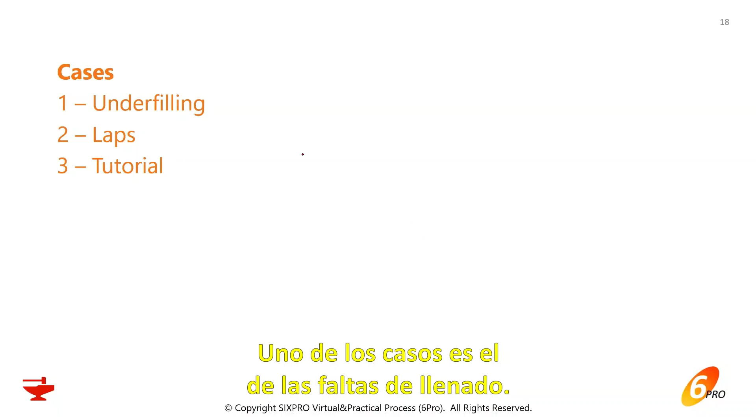Now let's talk about the cases. For this short training, we prepared 2 basic cases, and I'll also show you a tutorial where there are many others. Let's go step by step - one case of underfilling, and one case of laps, and I'll show you where to find the tutorial. It's very easy to access.

Underfilling. Let's look here on the left - it's the initial technology for the forging, and on the right is the optimized technology. What happened? You can see this part is different from this one. This one is well finished, but this one has underfilling - it doesn't fill the dies. You can see there's more material here in the flash than in the final part, because more material went out due to underfilling problems. You can check also here, here, and there.

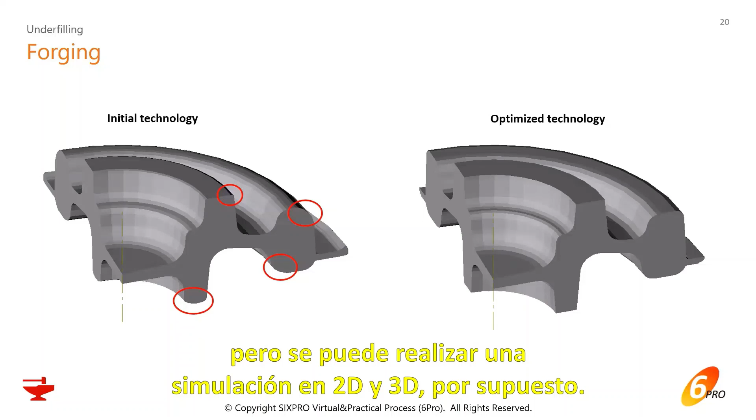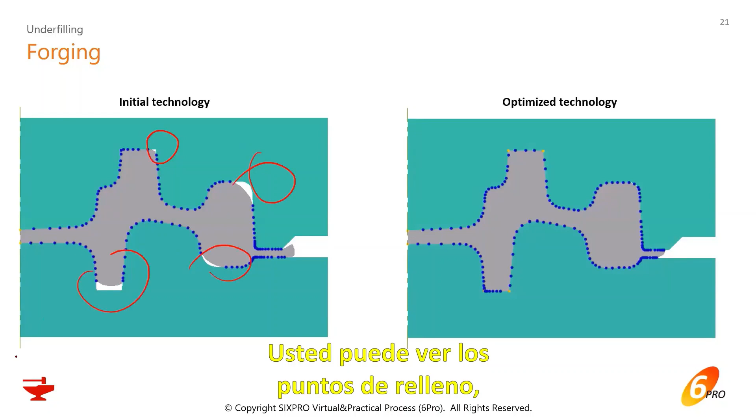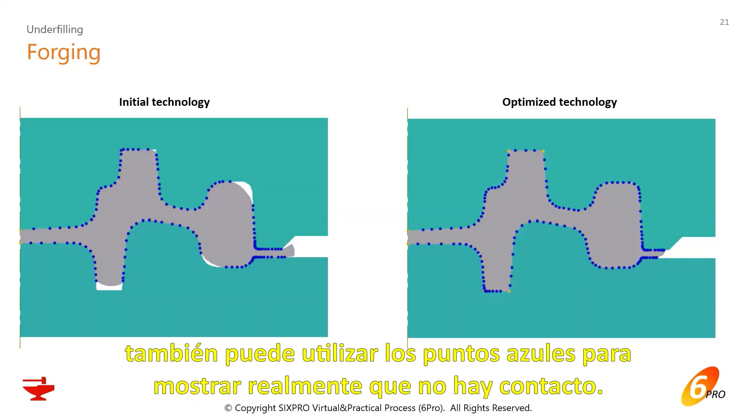Let's show here how you can simulate that. By the way, I'll just show 2D simulations because they're faster, but you can conduct both 2D and 3D simulations. Here's the initial technology and optimized technology - you can see points of underfilling. You can also use those blue dots to be really sure there's no touching.

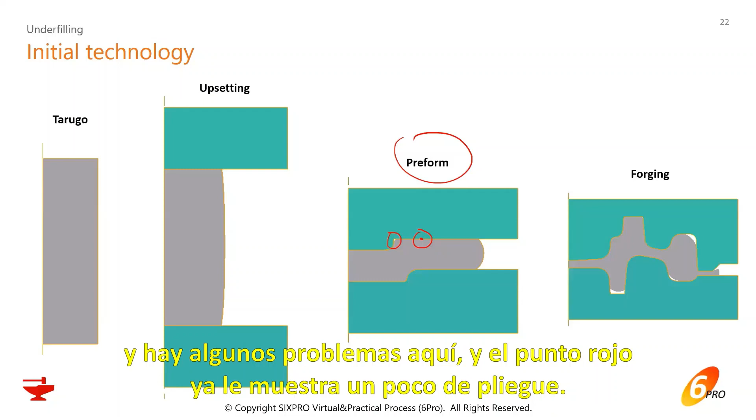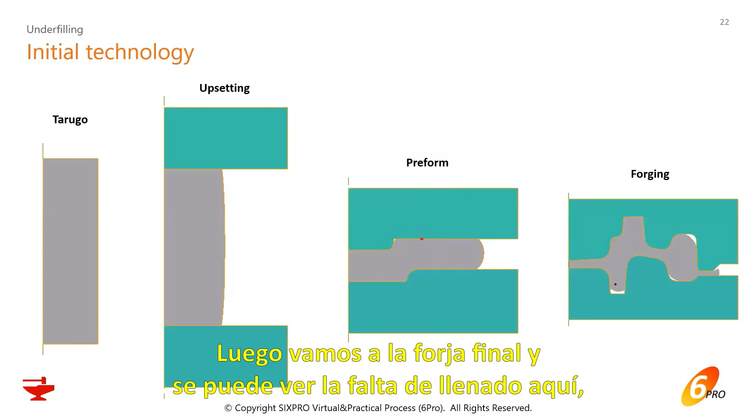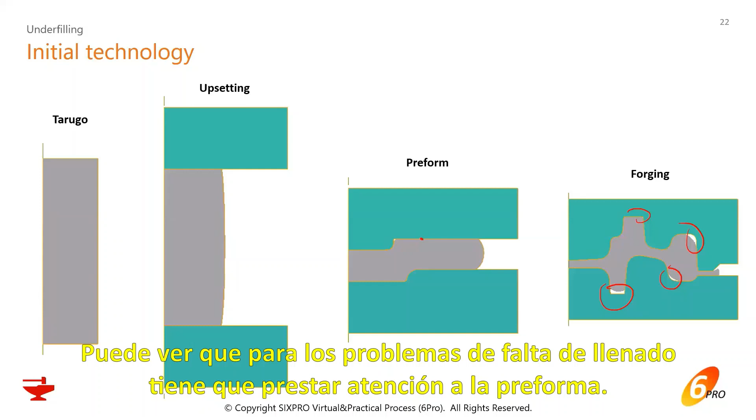The optimized technology is on the right side. In the initial technology, you can see there's an upsetting operation - this is a 2D axisymmetric line because the part is round and symmetric. Then you have this preform, and there are some problems here - you can see underfilling also. This red dot shows some laps, which isn't the objective of this case, but you can already see it. Then in the final forging, you can see underfilling here, here, and here, and also one there.

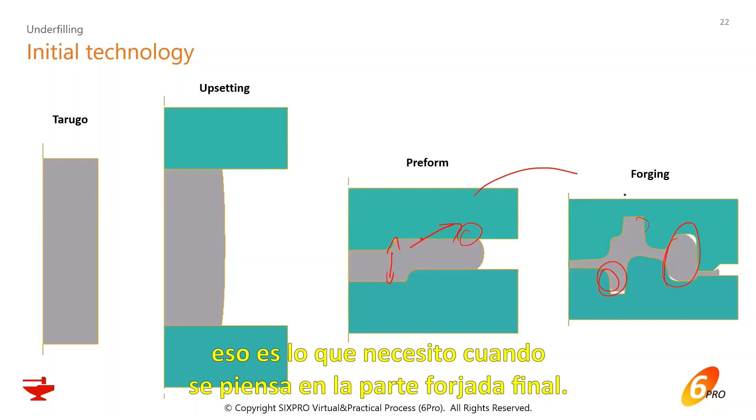For underfilling problems, you have to pay attention to the preform, because we need more material here and more material here, and also a little bit there. So maybe if we increase the amount of material in this part and flow more material to this part, that's what's needed considering the final forging part. So we're basically going to change this preform.

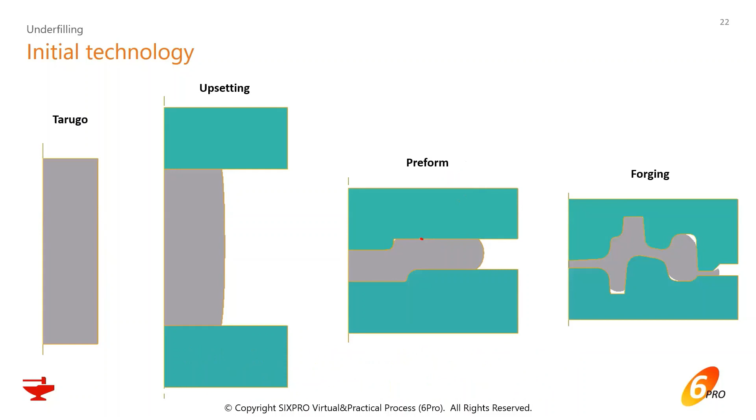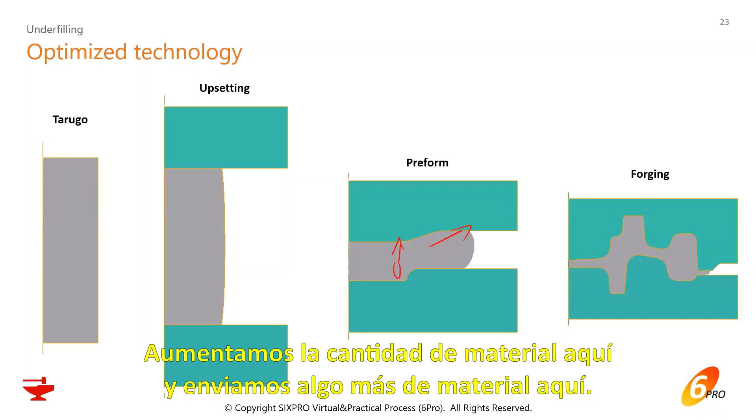Here's the initial technology and the optimized technology - we increased the amount of material here and also sent some material here. When you check the final part, you can see there's no problem - it's fully filled.

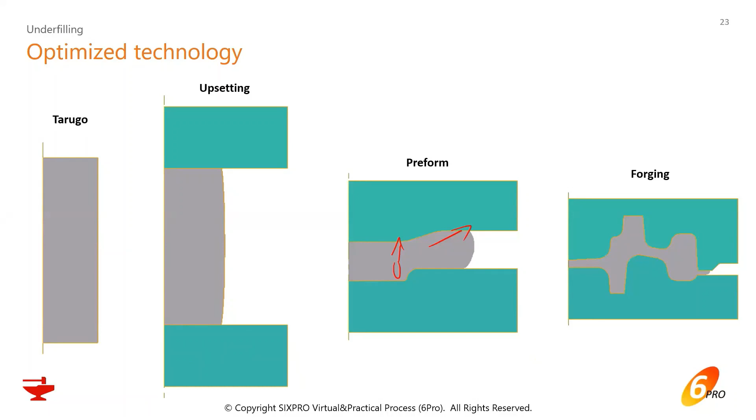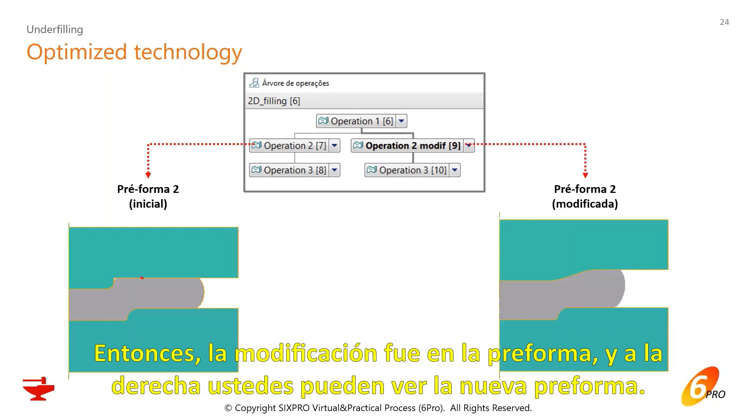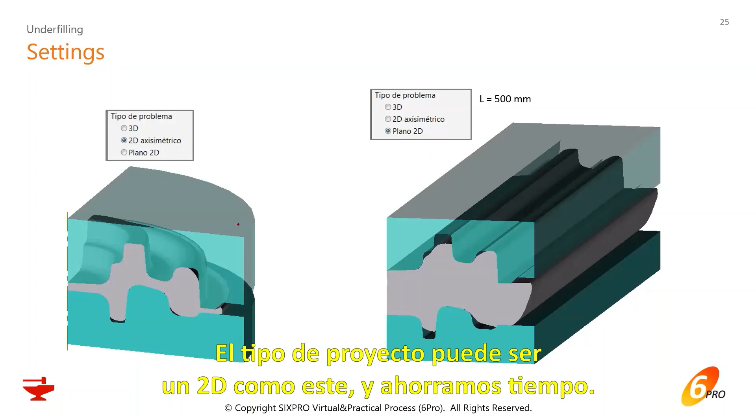Basically what we did was change one of the operations - we changed the die geometry. The modification was here: on the left you see the preform, on the right the new preform. The problem type can be 2D axisymmetric or 2D longitudinal, but doing it this way saves time - you tell the software this part is round, so you just specify it's 2D axisymmetric.

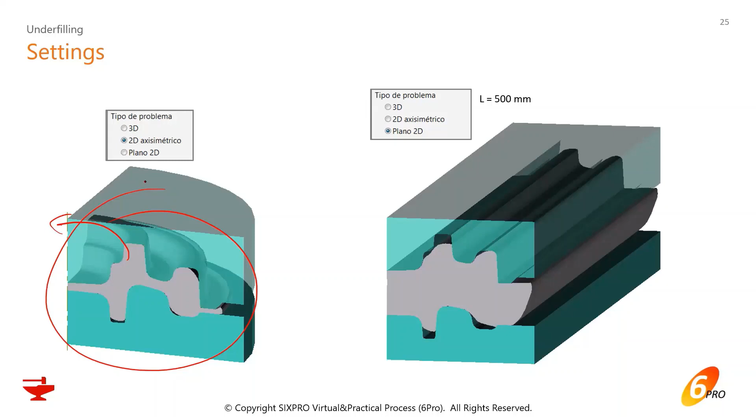We're going to provide you guys the geometries and the software, okay? But here in slide 26, you have all basic information you need for conducting a simulation. I'm going to show this here slowly, so you guys can understand that.

I'm going to just do this initial one, then you can conduct the optimized version. One thing I want to tell you is that I'm going to show it here. You still don't have the license, probably by this time.

But when you try it by yourself, understand that you have a step-by-step FE setup here, starting from slide 27. First, create a new process, then define the problem. It's step-by-step. Click forward, you're not gonna have a problem. If you have any kind of problem, just let us know, I'm gonna help you right away. Then you can see it step by step.

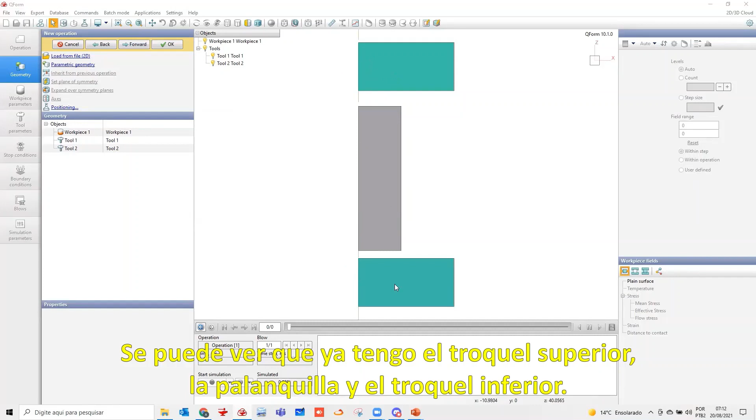Now I will load files, load the geometries that you are also going to receive. And when I go here, see, I'm gonna choose this initial one, and you can see I already have the top die, billet, bottom die. Okay, it's all here. All right, and go forward.

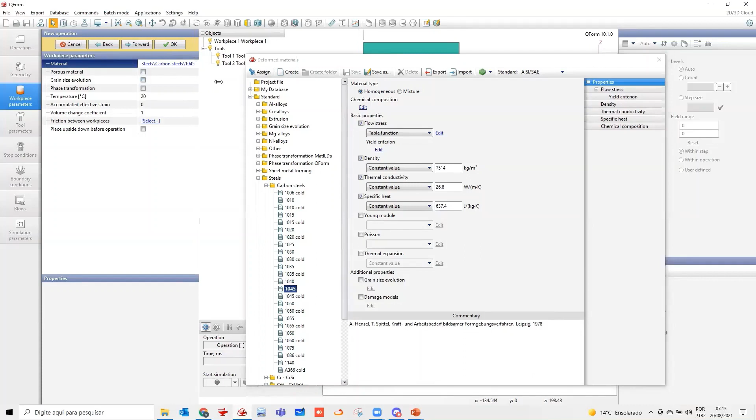Now I'm going to select the material. I have to remember which one. If you go to slide 26, you're going to see it's 1045. Initial temperature that comes from the furnace, it's 1200 Celsius. So the material here, I'm going to pick 1045, assign it. You can see it's already assigned there. And now let me close it. 1200.

And forward. Now it's time to set the tooling. All right, so for tool 1, you can see here is also in orange. Tool 1, my presentation says, okay, consider a mechanical press with 25 meganewtons, and that's what I'm gonna do. So I have a lot of information here, so I'm going to the mechanical press. There's this one, mechanical press, sorry, there's this one here, and assign that.

So you can see, because actually my upper die, the top die, is attached to the press, so we will have this movement, and the bottom die is going to be fixed, plus OZ. Okay, two clicks here, it works. Assign here also works. All right, lubricant, I'm going to choose a lubricant, hot forging, steels, graphite plus water.

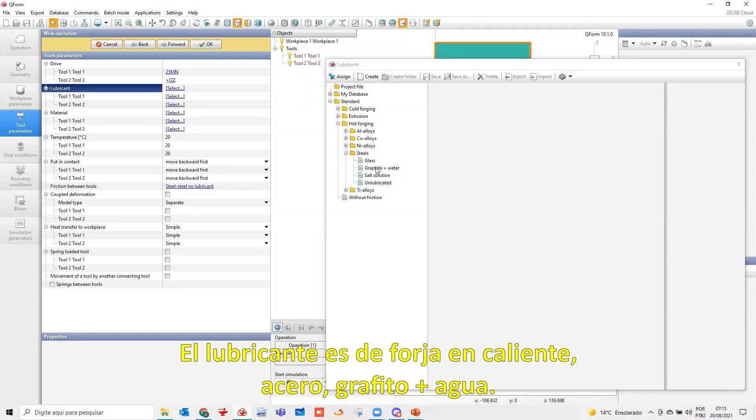Material, it's H13, right? H13, and also there is a heating of the dies. Let me check here again. It's 300 Celsius, all right, so the dies are preheated. Okay, that's it, now I can go forward.

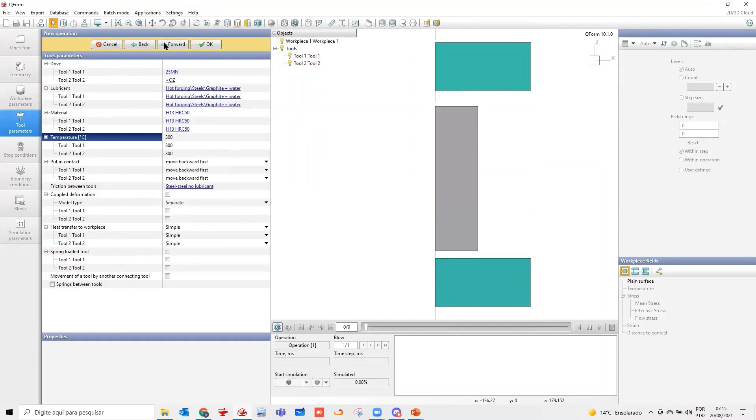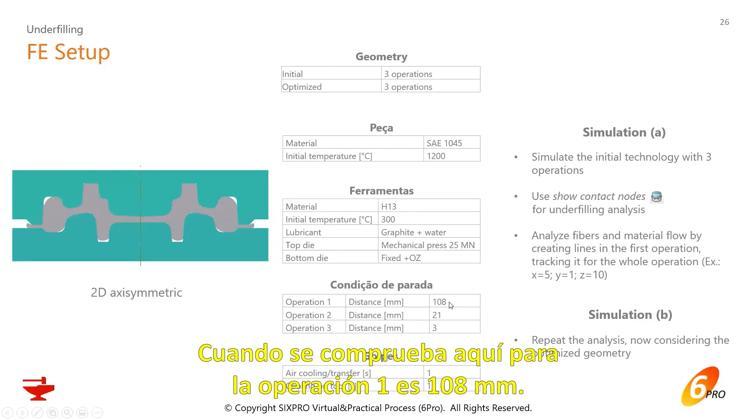And what is the stop condition? There are many stop conditions here on the left. When you check here, it is for operation 1, 108. Okay, stop condition, so let's do this. Distance 108. All right, and you can go forward.

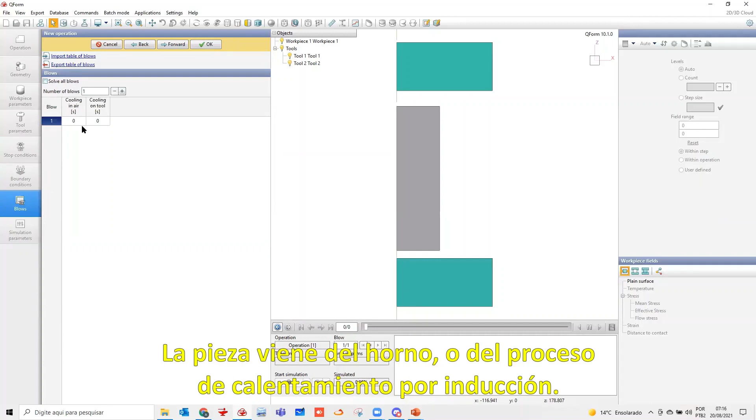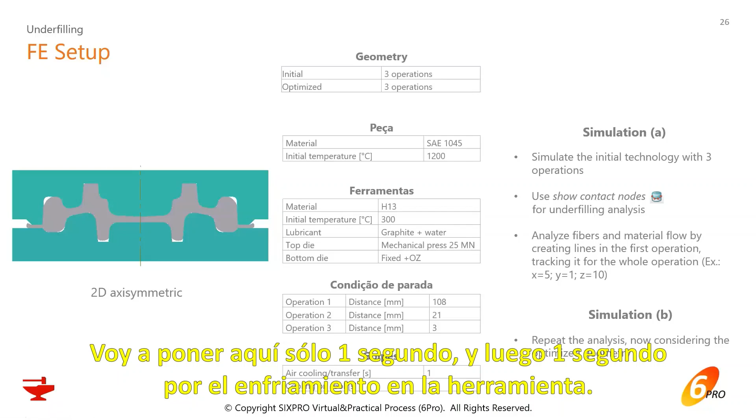And that's all. By this time I can... there is also this, because the part comes from the furnace or from the induction heating process, and it has a transfer, right, and cooling in the air. Then after cooling in the air during the transfer time, it cools also when it's on the tool, on the die, because it changes heat by conduction. So let's say the furnace is very close to the press, so I'm gonna just put here 1 second. You can put 2 seconds, 5 seconds, and then 1 second for cooling on tool. So it's one here and also one here.

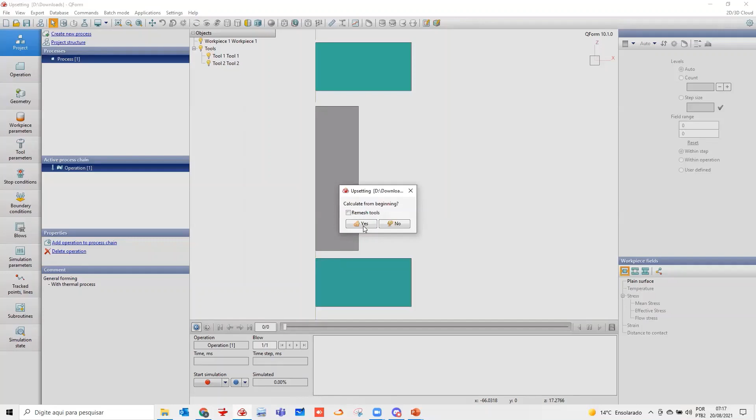All right, let's click OK, and let's start the simulation. Restart. Yes, and I'm gonna save here. Upsetting. All right, I saved somewhere in my computer the results, and here we can see it working. It starts connecting to the license server.

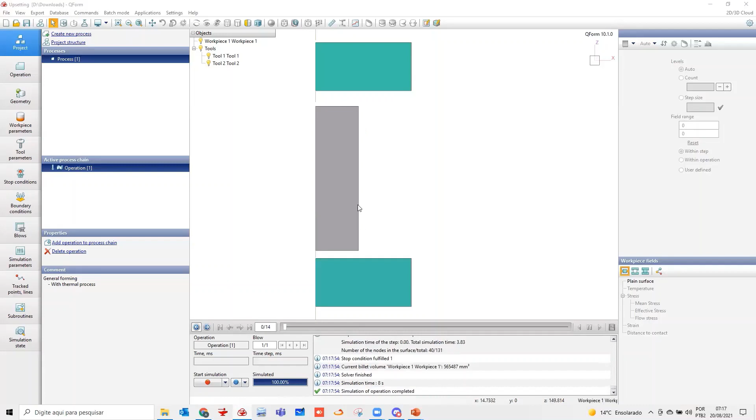Something important here: I'm watching the FE setup, but if I go to the right, I can see the simulation, and I can even work and go forward and backward on my simulation. See, you can also see it in 3D. Okay, this is my part here. I can turn off the dies or the part if you want.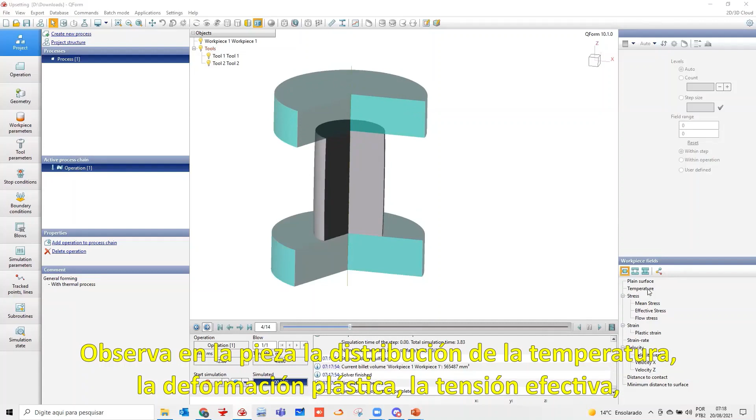I can also make it like this. You can watch on the part the temperature distribution, plastic strain, effective stress, mean stress, flow stress, and the strain rate also, vectors of speed and velocities. So you can see how it works for any type of part that you're going to forge.

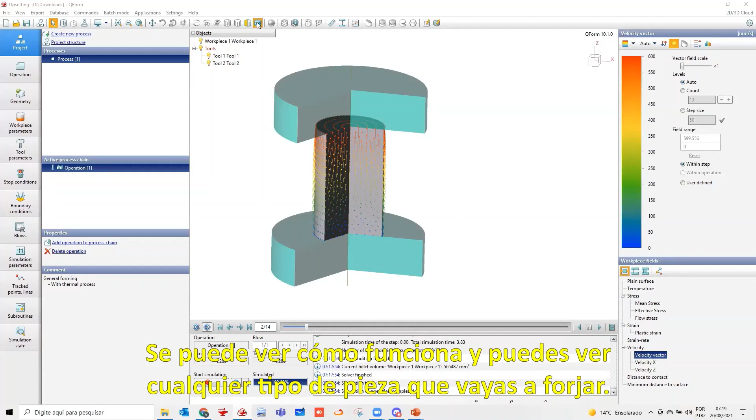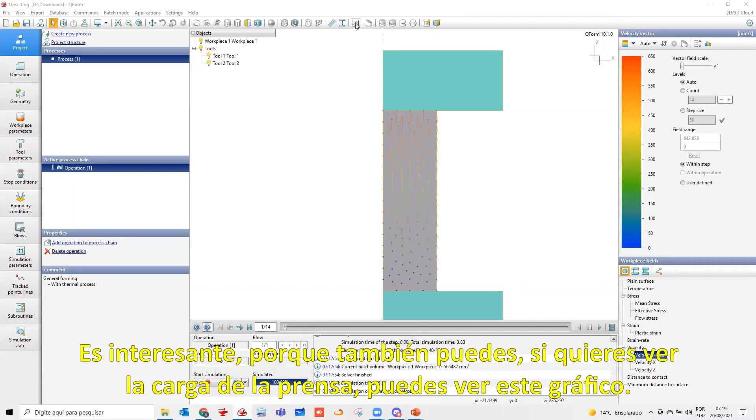Okay, and also have this type of visualization. It's interesting because, let's say, I want to see the press load, so you come here to this graph, and you can also see the load by the displacement of the top die. So displacement, and you can see the load during the process.

More than that, you can also track, like putting a sensor there. You can track any point in this. Let me put it like this. So you can, for example, come here to track points and lines, and I can track any point anywhere I want.

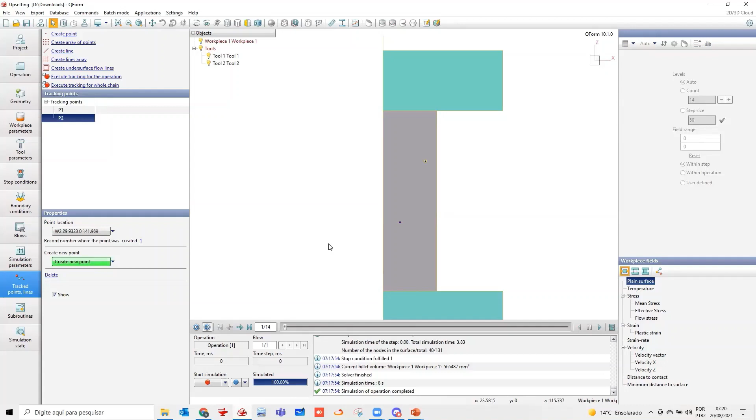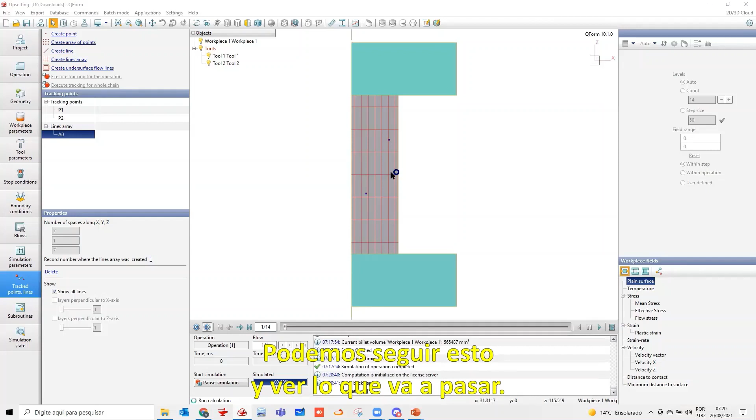I also would like to see the fiber deformation. Just put some fibers here, vertical or horizontal, and you can track this. You're going to see what's going to happen, and you see the fiber deformation and the points here.

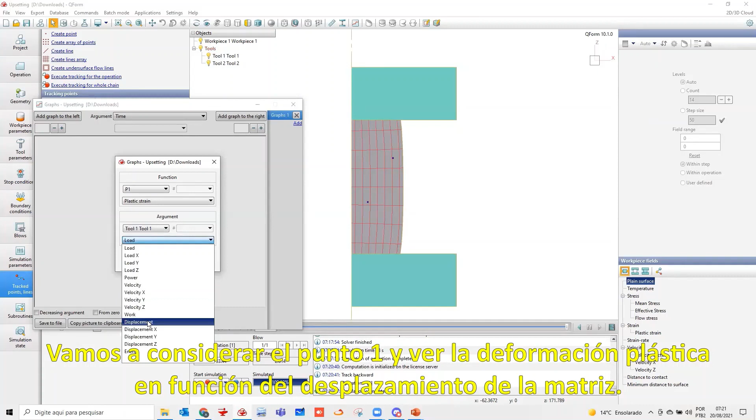For example, let me do another analysis here. I'm going to consider this point 1, and what was the plastic strain there in function of the die displacement. So you can see that the plastic deformation increases, of course. I'm going to also put the other one, point 2. So point 1 had a bigger deformation - interesting.

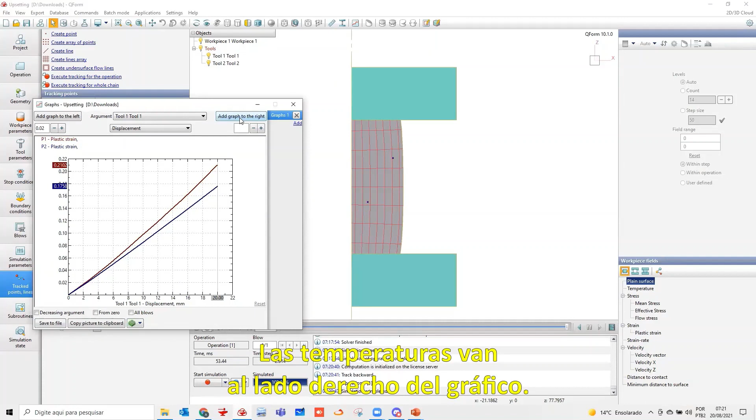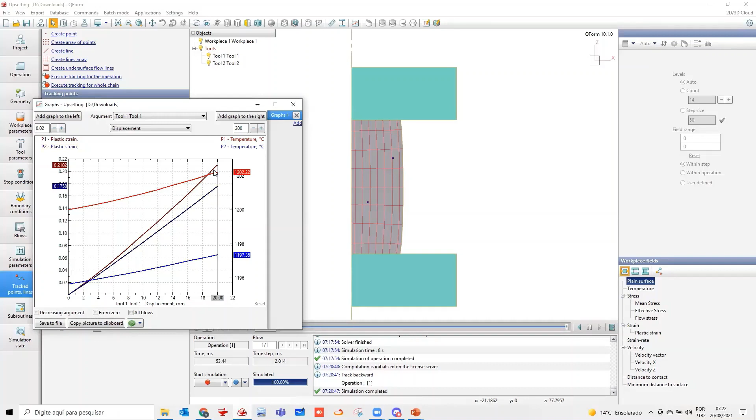And I'm going to put on the right side of the graph, not plastic strain, but temperature, for point 1. So you see that as it deforms and strains, the temperature increases. Let me also see for point 2 - I also have temperature, and both increase because both are increasing their plastic strains. So you can create this, then export and analyze it. It's good for understanding the process, for conducting your research, and also for proposing solutions to a process.

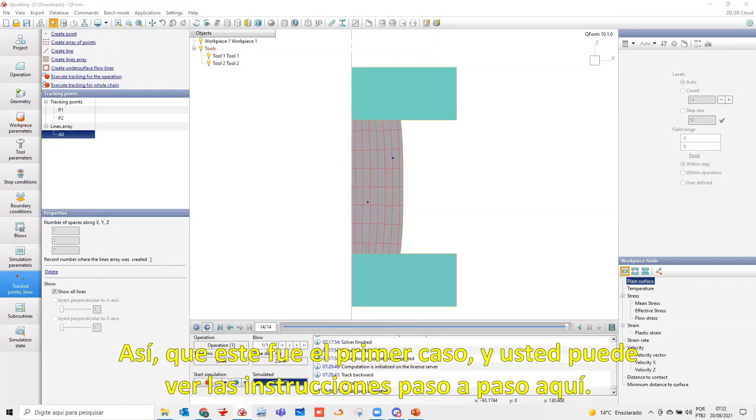All right, so this is the first case. It's all well shown step-by-step in the instructions here. Okay, now let's go to the second case: lap prediction.

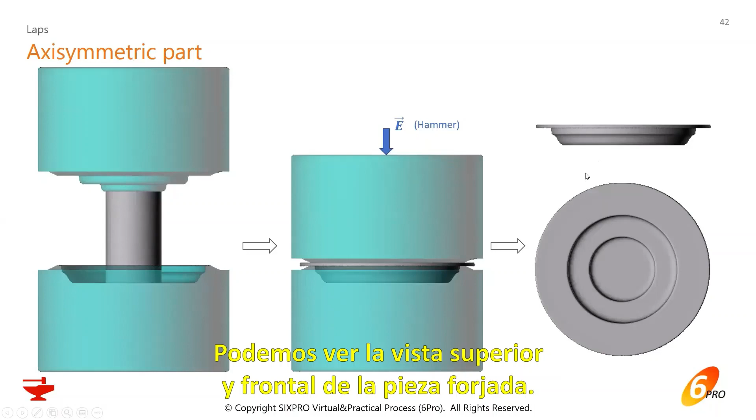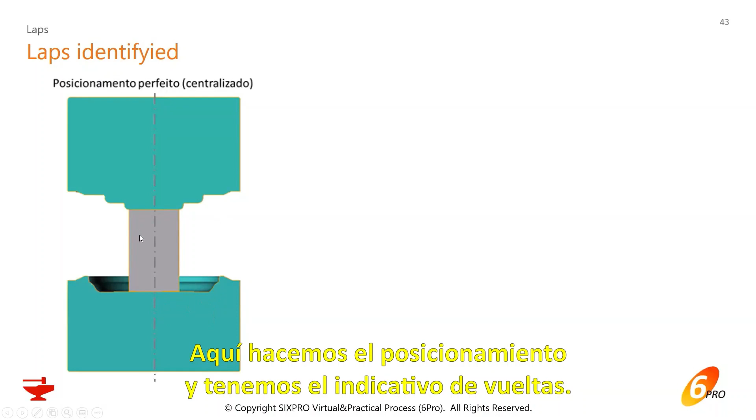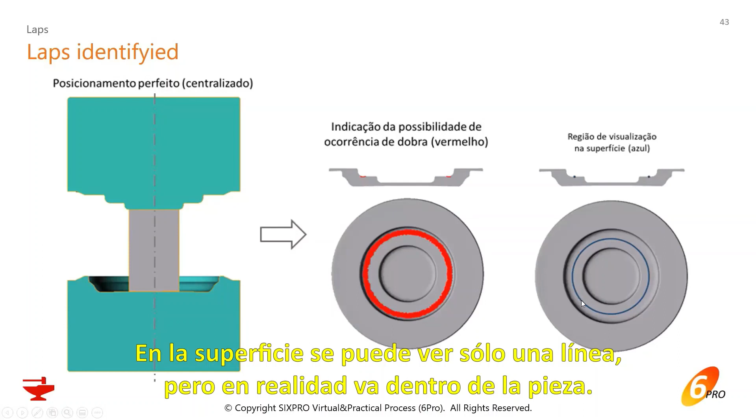Here we position it all in a very good 3D simulation. We position that here. Here we have this indicative of a lap. And then you can see, if you look only on the surface, you're going to see a line because of the lap - it's only a line, but it actually goes inside the part.

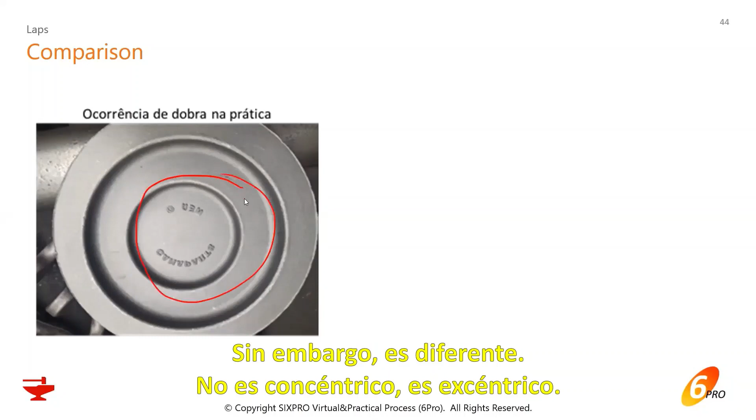Okay, so when you go to the practice, to the right, you can see that there is a lap here. They had already changed the tooling we used for simulating, trying to solve that, but it was still there. It's there, but it's different - it's not concentric, it's eccentric. You see, when you look at that in practice, it's different from what we simulated.

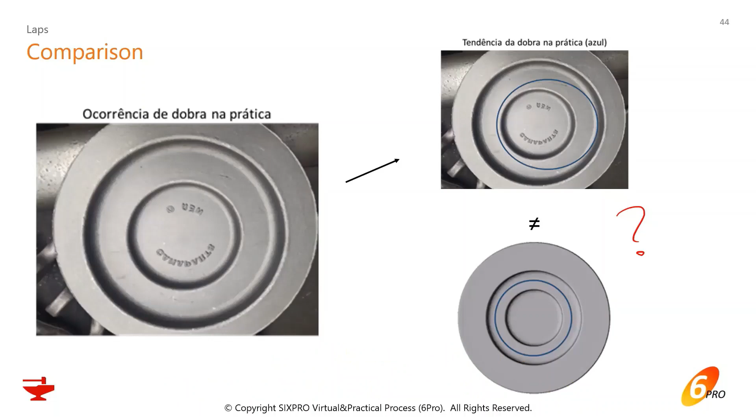Why? At least we did one first simulation with the not-modified tooling geometry, all right? And we got that - we got the problem right in the first simulation.

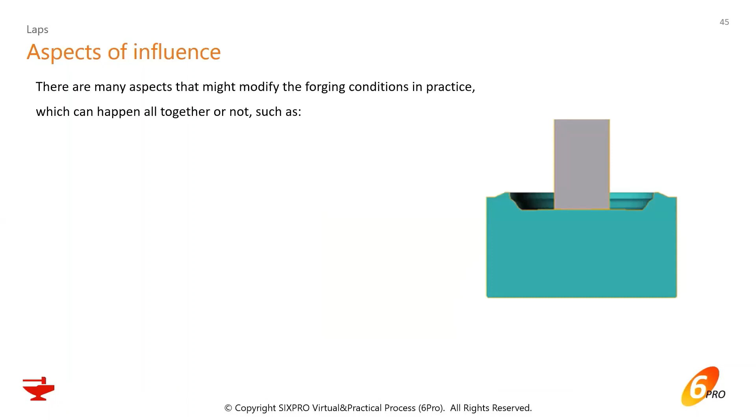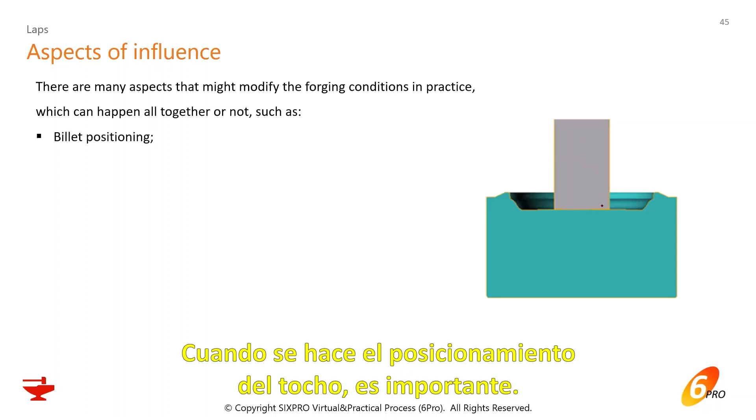When you check here, let's talk about some aspects of influence in the forging. Let's say when you position the billet, it's important - you can see there is no reference for positioning the billet there, and it's important to have this reference. You also have a billet geometry precision issue when you cut it. Also, the surface of the billet might have some problem, a slope that might influence the process. The dies might also have a slope during assembling.

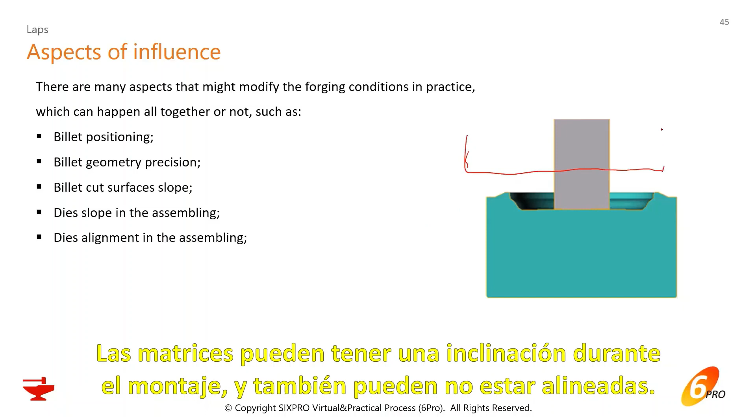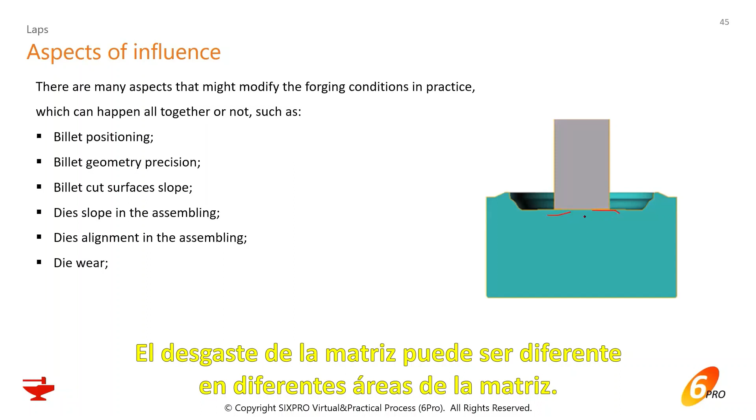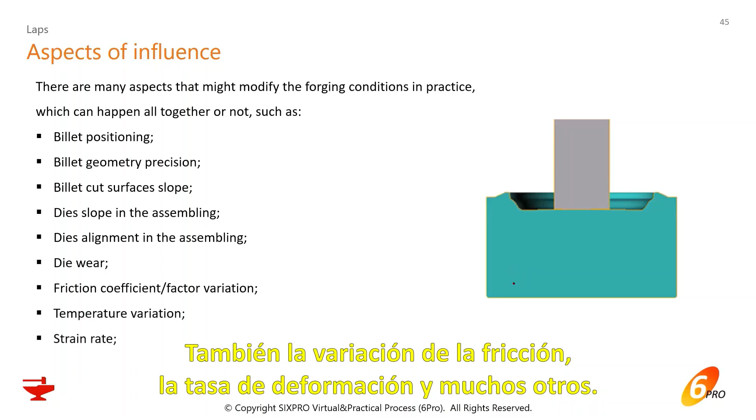Also, they might be not aligned. The top die might have some problems during the assembling. Die wear: it might wear more from one side than the other, and then it creates differences. It's possible. Also friction coefficient variation, temperature variation, strain rate might change that, and many others. Here I'm going to just talk about one of them. It can happen in only this one, but it can happen with many of those combined at the same time.

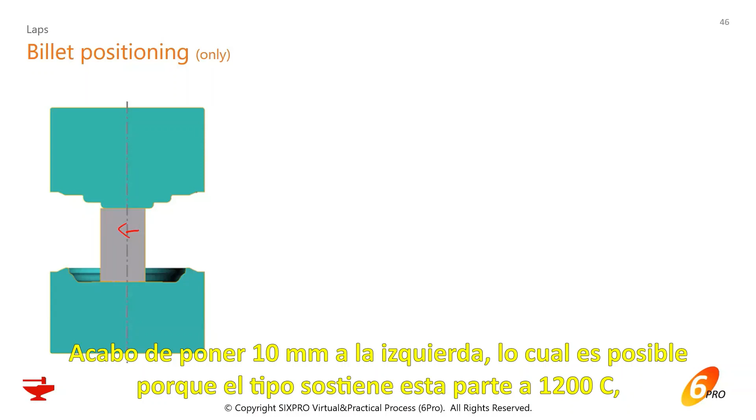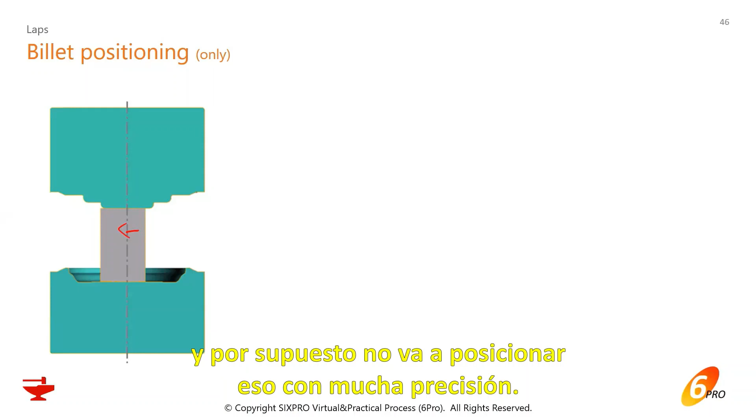And you can see there is no positioning reference. So just put 10 millimeters to the left here, because it's possible. The guy there holds this part at 1200 Celsius, and of course he is not going to position that very precisely, because he has no reference. And then when we simulate that, you can see already that the laps is already not concentric, as it happened in the practice.

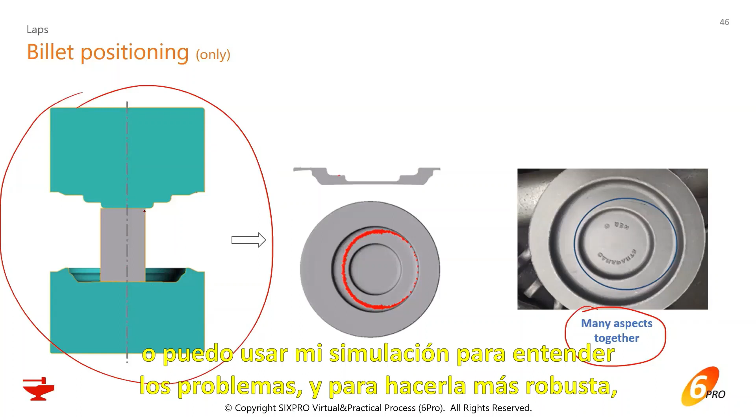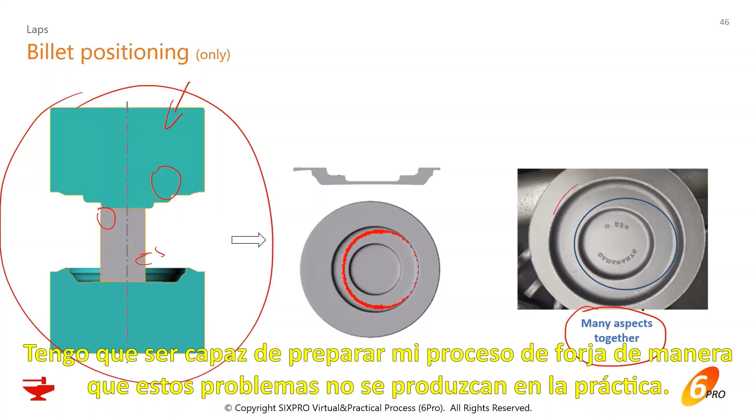However, in practice I have other aspects of influence altogether, and I can work on my simulation the best I can, or I can use my simulation to understand the problems and to make the process more robust, so that it can absorb any problems with the billet, the dies, positioning. So I have to be able to prepare my forging process in a way that this thing won't happen in practice. So this is very important.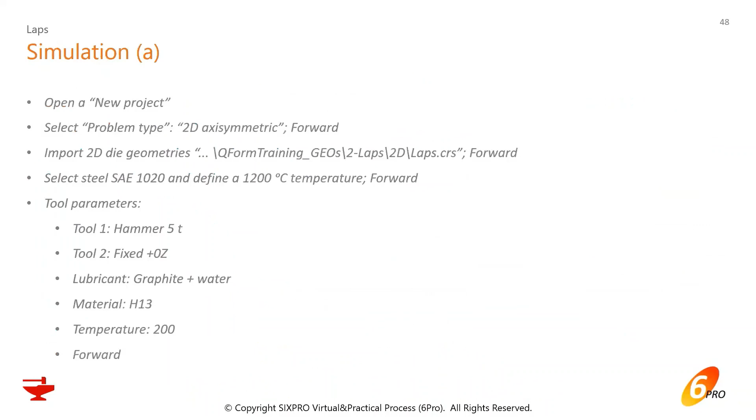And here you will have this case for you to simulate by yourself. Here are the data that you should consider, and also different exercise simulations A, B, C, D, and so on. And then of course you have the step by step you need. Okay, so let's do this project. I'm going to create a new process. It's going to be 2D. Be faster here. Go forward.

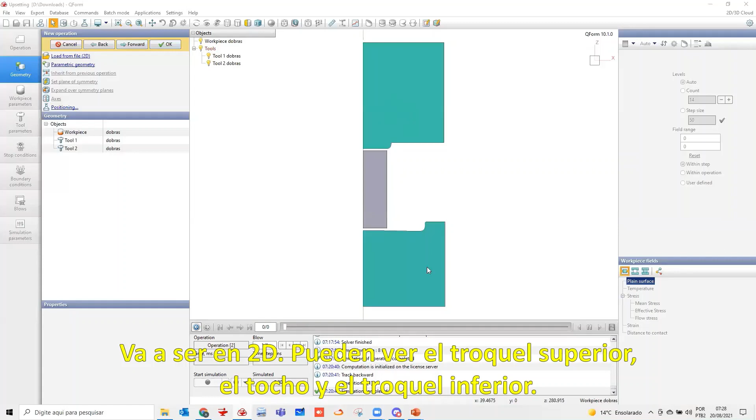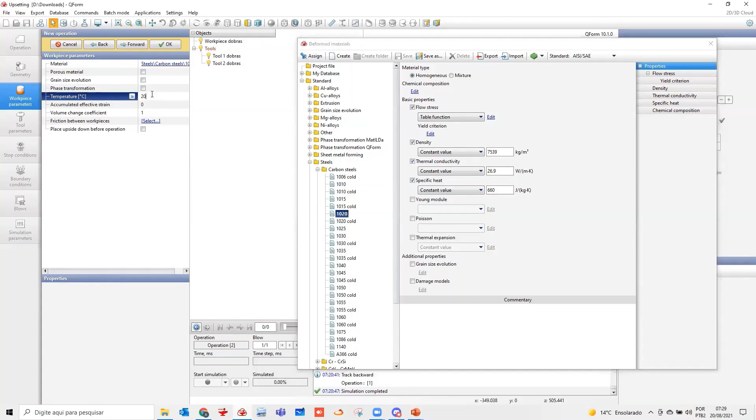Now let me get this 2D here. As you can see, top die, billet, bottom die. Just go forward and I'll select the material. Let me see which material it is. It's a 1020 at 1200. One thing is that you can put the material naming in any standard you want, right here. 1200. Okay, go forward. It's good that you can move the windows so it can be more convenient for you.

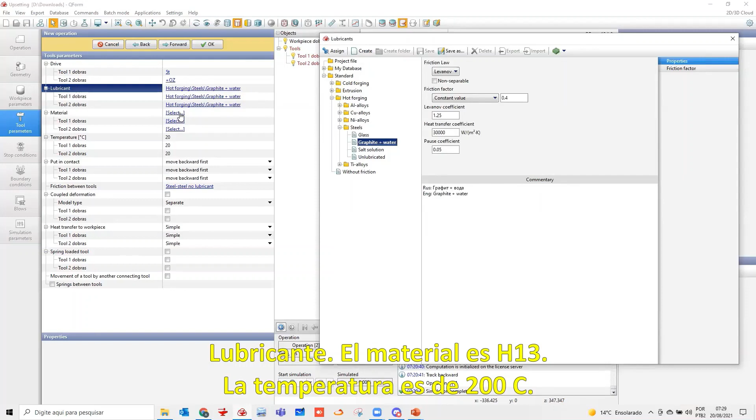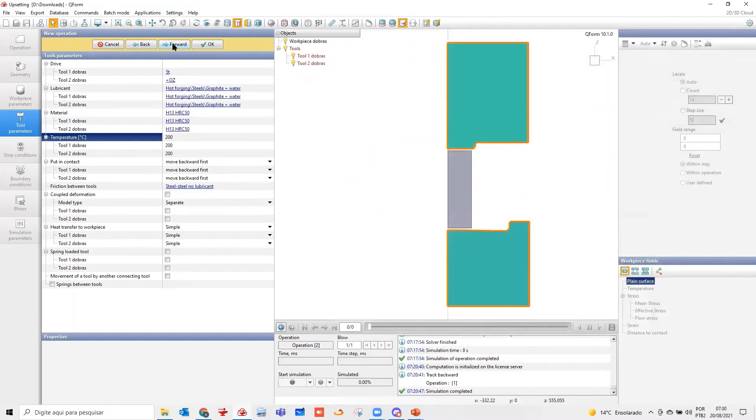Top die, it's a hammer. Which hammer? It says here it's 5 tons. So I'm going to get this 5 ton hammer, assign, and bottom die fixed, lubricant the same here, material H13, preheat 200 Celsius. Okay, go forward, and the final distance, stop condition, it's going to be a distance of 5 millimeters. Just like that.

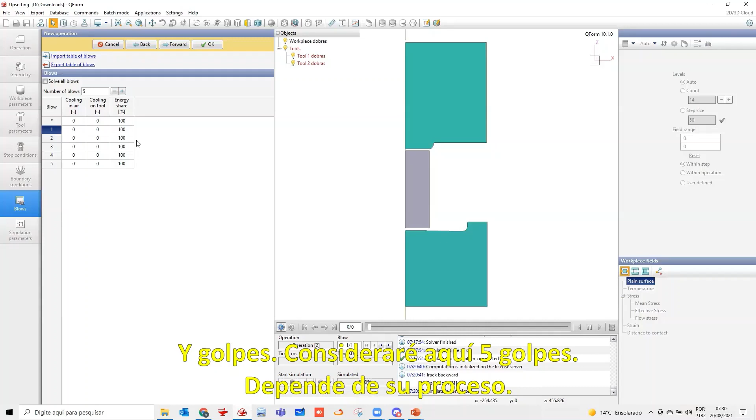Go forward, everything is the same, and blows. I will consider here 5 blows. Depending on your process, you're going to need more or fewer blows for the hammering process. So 5 for me here is going to be okay. The detailed instructions ask you to consider those 5, maybe 8. It doesn't matter how many you put. If you put like 10 blows, it will stop by the stop condition of 5 millimeters. So you're going to actually see how many blows you would need.

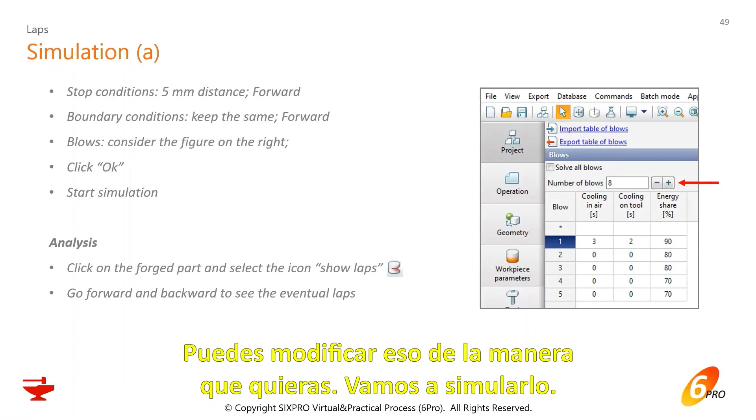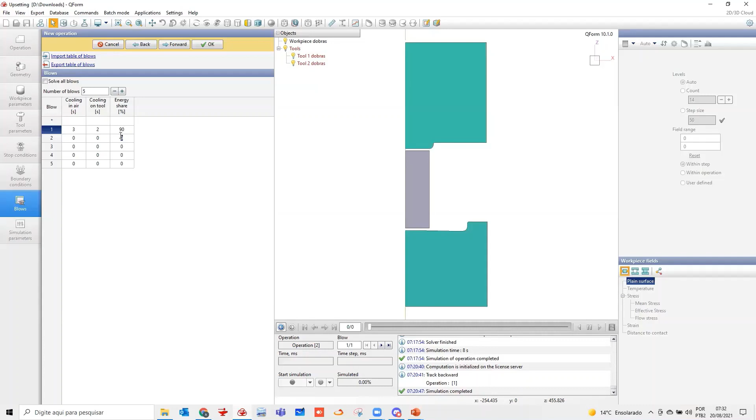So first of all, what I'm considering here is that cooling in the air takes 3 seconds, then cooling on the die is 2, and you can consider whatever you want between blows. And there's also energy share. I'm going to put 90, 80, 80, 70, 70. You can modify that the way you want. So first one is 3 to get into the hammer, 2 to start the process, 90% efficiency. Then 80%, 80%, 70%, 70%. Go forward. That's it. And let's simulate it.

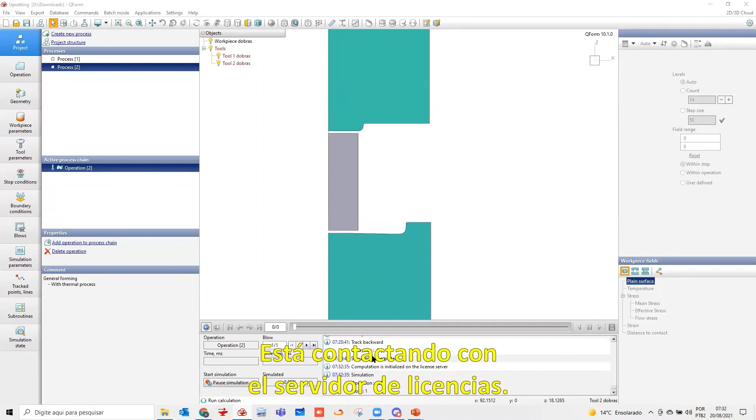It's contacting the server. Remember that you can change the arrows here. Oh, now it's on the second blow. You can see here the blows. It worked for the first, now it simulates the second blow. It's very nice. When you check the results, you can go forward and backward on the blows, and within each blow you can go forward and backward.

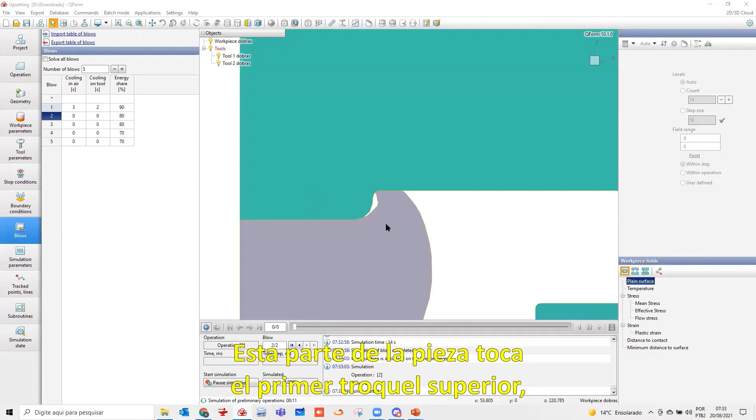You can see actually here it's going to have a problem, because it ran the first blow, and then this part of the workpiece touched the top die first, and will keep going, and this surface here will fold onto the surface here, so we will definitely have our lap here. I'm going to stop this one here.

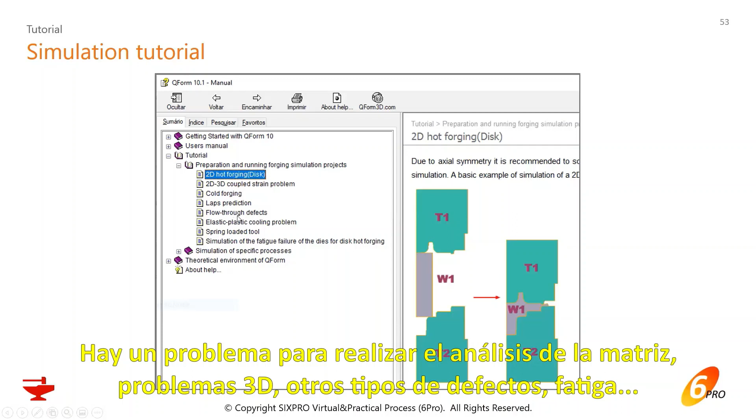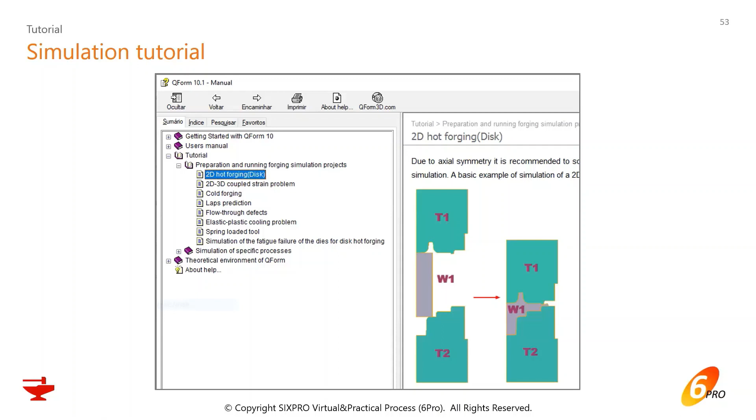And to conclude our short training, let's go to the tutorial. There are many other examples there, cases, so you're going to learn more and more. If you go to the help menu, you're going to see the tutorial, and you have several, also step by step. The geometries are already in your software folder, so you just have to follow the instructions step 1, 2, 3, and you will be able to simulate. Die analysis is very nice, 3D, many other types of defects, fatigue. It's also interesting to see the number of cycles to crack your die. That's it.